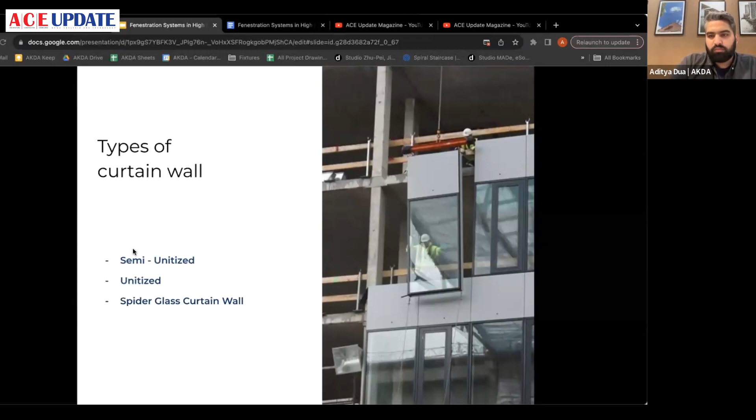There are basically all sorts of glass facades that encompass a high-rise building, or buildings which are made today, which are usually office spaces, and these big residential or mixed-use towers. So they can be categorized basically into three options. So there's a semi-unitized system, there is a unitized system, and then there is a spider glass curtain wall. So I'll just show you an animated graphic that will sort of take you through how these systems work.

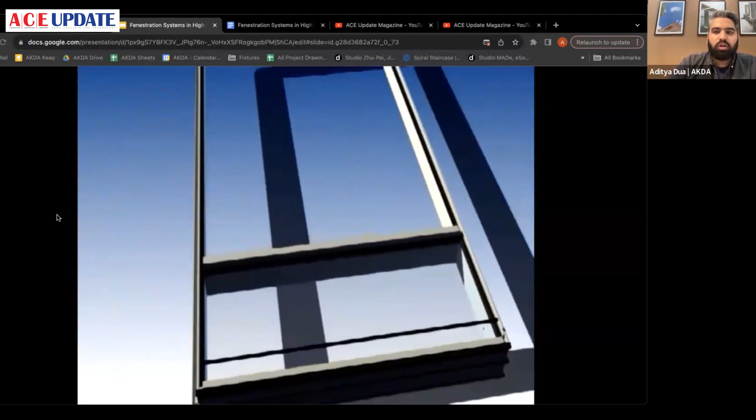So a semi-unitized system or a stick-built curtain wall, they are assembled piece by piece on site. All the components of a window, they're all manufactured in a factory, but piece by piece they're brought to site. The mullions and transoms are all installed first on the structure of the building, and by this the glass is cladded on the site itself.

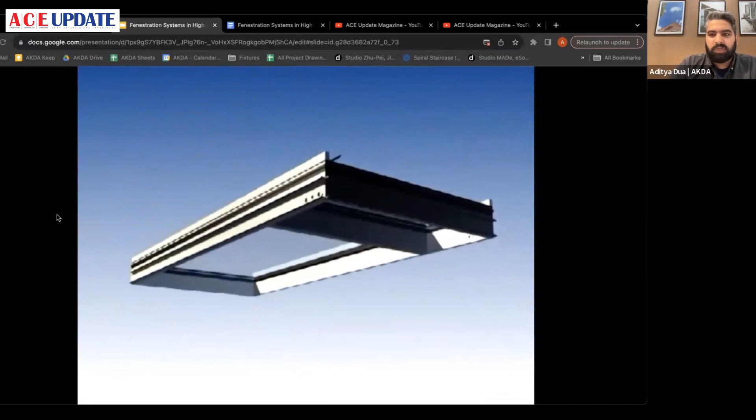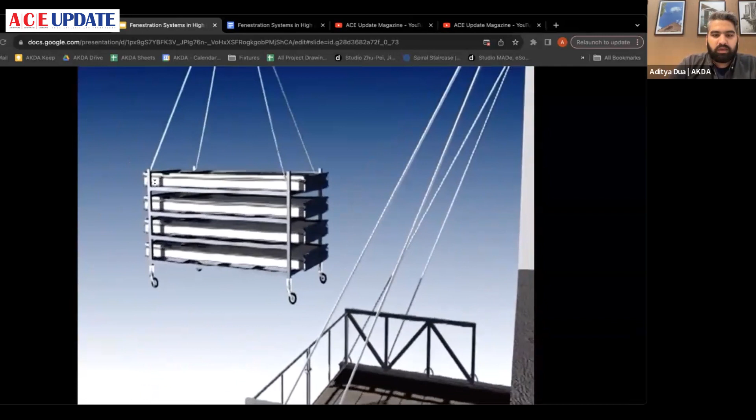A unitized curtain wall is different from a semi-unitized curtain wall in a way that a unitized wall is all manufactured inside a factory itself. So this can be classified as a prefabricated product. These are assembled into large units or panels in the factory, and they are then transported to the site wherever they are meant to be installed, and they are installed as complete units.

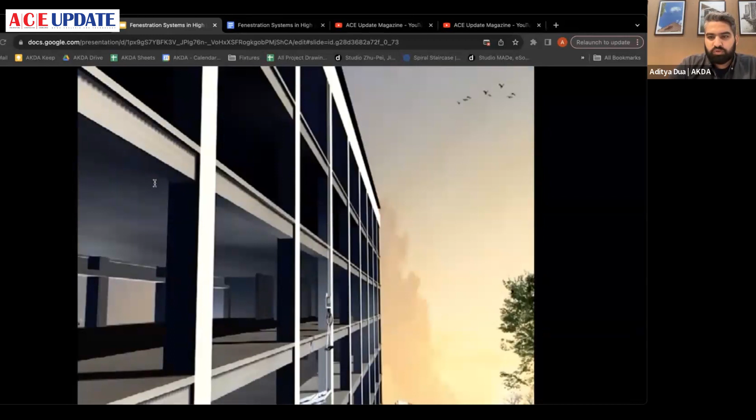So in a way, unitized systems offer faster installation, and they reduce on-site labor. They create a healthy working environment because there is more space to store the building materials properly. Obviously, having a faster construction time saves a lot of money for the clients as well.

The third type is a spider glass curtain wall. So these have been around for a very long while in India. They use spider fittings, which are basically metal bolts that grip the edges of the glass panels, and this system creates a frameless, transparent appearance.

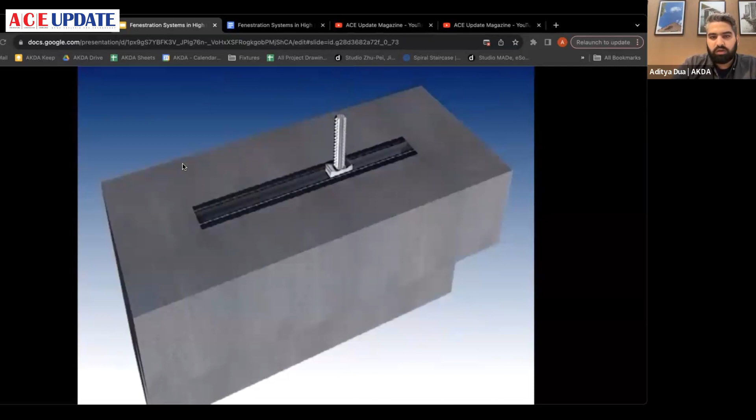So since the panels are stuck to the building using an external bolt, which appears like a spider, and hence the name, they don't have a frame, right? So you get a very seamless looking appearance of the building. So these offer architects the freedom to design expansive glass surfaces with minimal visible supports.

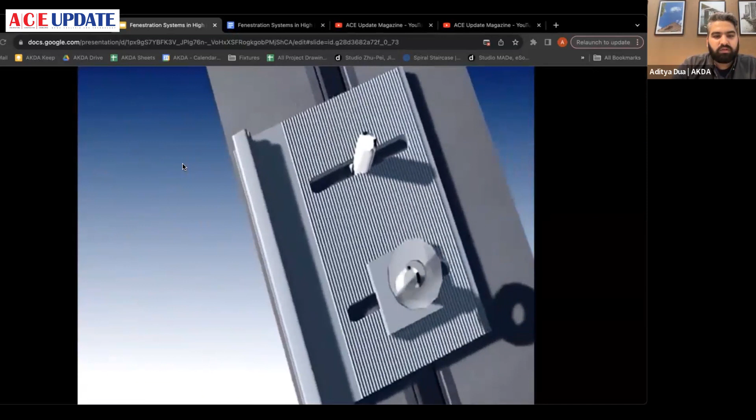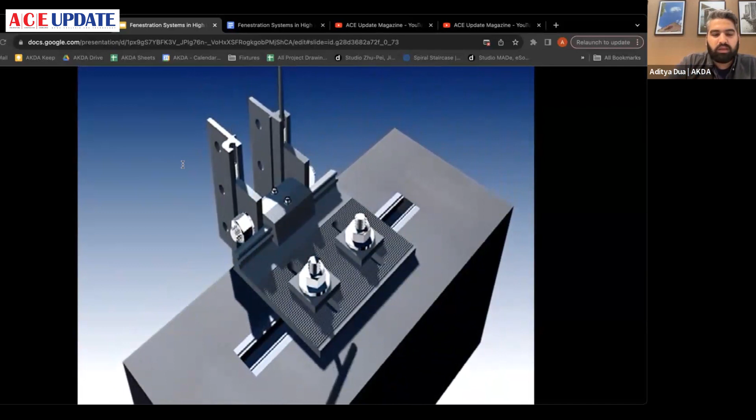Recently, semi-unitized systems and unitized systems have also been introduced into the markets in India. We ourselves have been working with these systems in a couple of our projects. We've been working on some office buildings in Delhi. In one of the completed projects that we've done in Central Delhi, we have used a unitized system wherein the glass was fabricated at a factory and then brought to site by trucks and then installed.

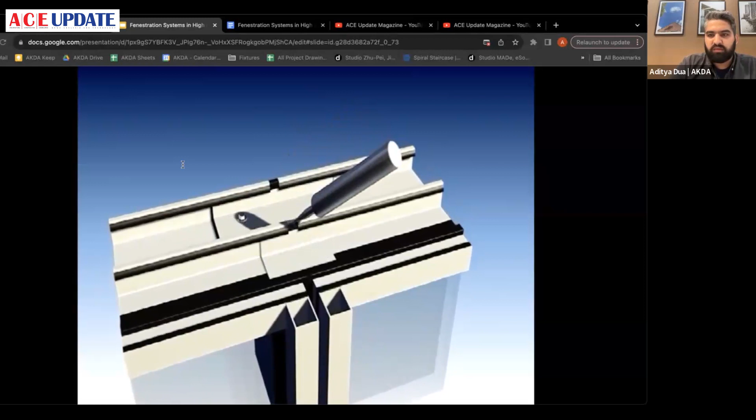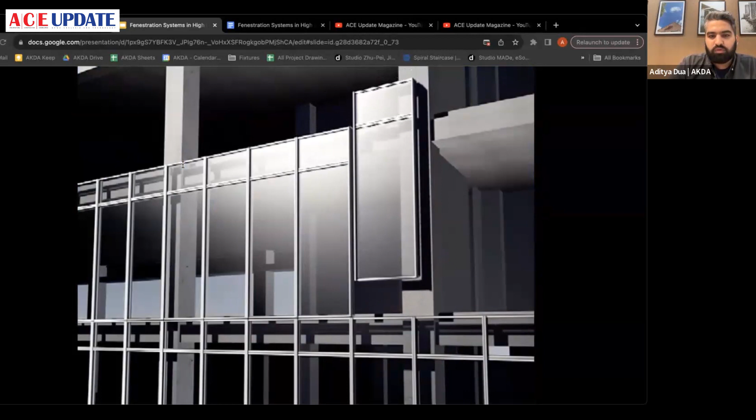Unitized systems also, it's a double glazed unit system. We can specify if we want to use a low E glass in that, and they also have all the technology that has helped make them fire safe as well, all the thermal breaks and the gaskets, all the fittings that they use along with the glass inside the frame itself, that we have been using for a couple of our projects. And the graphic that you can see, these prefabricated panels, so to say, they come at site and they're just clipped onto each other. And that's how this sort of encompasses the building completely.

Moving on, what I want to focus on and what we are particularly interested in, is the innovation in fenestrations for a more sustainable design, for upcoming buildings, for the buildings of the future, which we like to call smart buildings. How do we actually make them smart? So there are many ways to go about it. There is energy efficient glazing, which is a glass with low E value, which sort of retains a lot of natural light that comes from the sun, but it resists the heat coming inside, so that you can keep the insides of the building cool.

Then there are thermal breaks. Thermal breaks is a system inside the glazing system. It sort of stops any sort of heat gain, and also acts as a fire safety unit, which stops fire going across the floors. Now we've always had passive shading systems.

Passive shading systems, by that I mean that if you integrate some sort of projections or a shading device, which stays very static, and naturally, by the virtue of its dimension, it shades the glass of the building.

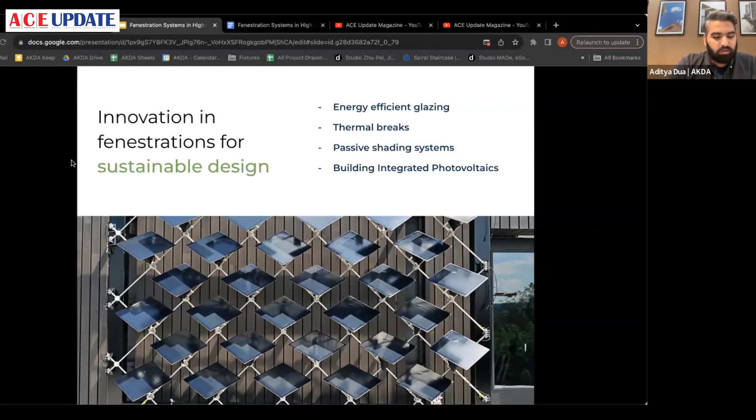The most interesting development that we have been looking to work with in one of our recent projects is building integrated photovoltaics. So what this means is that if it's a high-rise building, we have a lot of vertical surface area. Now, what we intend to do in the future is that this surface area, rather than make it just a component where you can get natural light from inside and have a view outside, it's a great opportunity to harness a lot of solar energy from these large surfaces.

So BIPV, or building integrated photovoltaics, refers to the integration of solar energy harvesting features directly into the building envelope. We have solar panels on the rooftops; what we are talking about is putting solar panels on the vertical faces of the building. Now, BIPV seamlessly merges solar technology with the building's architecture. This integration provides both the functionality of a building material and the capability to generate electricity from sunlight.

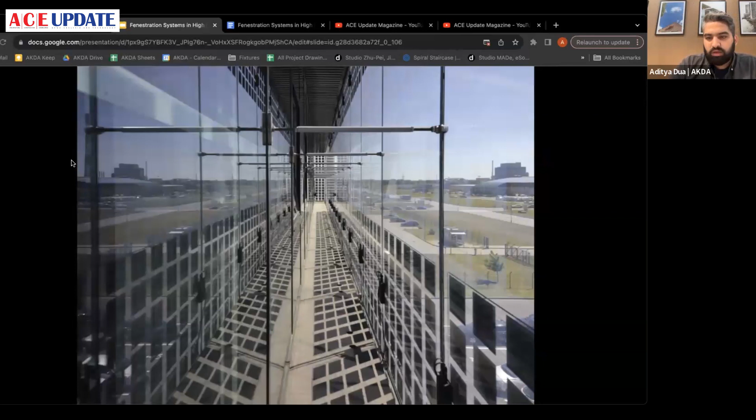So in this image, on the left side you have the interior of the building. On the right side, you have the exterior. And having a certain gap between the main window that you have inside and these BIPV panels, you also get a thermal insulation buffer by the virtue of the gap between these two surfaces. And this is how they look. If you have a solar panel which is stuck to the glazing of the building, this is how it looks from the inside.

Now, BIPV systems can be designed to blend seamlessly, to have a good aesthetic value of the facade. What BIPV also does is utilize the existing surfaces of a building, which in any other case would have been a normal panel. You are now using it to generate energy, so you're not really using up any extra space inside the building.

Now, BIPV obviously can contribute to overall energy efficiency of a building by providing shading. As you can see, these cells that you have in the glazing also provide a natural shading to the inside of a building, and they also help in reducing the heat gain.

What we are also exploring, in order to cut the solar gain even more, let's say in the Northern Hemisphere, and particularly in Delhi, where the climate is very hot during some months, is to take it a step further and add some sort of active shading, these vertical fins that integrate with the glazings, installed on the facade of a building.